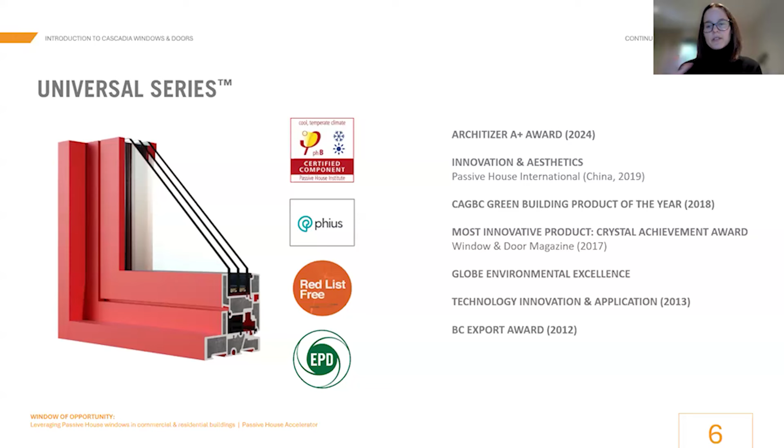And it's really the first of its kind to be designed, built, manufactured, and PHI certified in North America. The use of fiberglass also has these side benefits - you can see the sticker: red list free, non-toxic, low carbon, all that good stuff, which I'll go into more later. As we probably all know, Passive House certified products - you'll be interested perhaps to know that the Universal series got this nice prize for aesthetics and innovation when it was launched in 2019 at the International Passive House Conference.

And to start out with, I was hoping to get to know a little bit my audience. So put down your coffee and tell me what your experience is. How many newbies are on the call today versus how many of you are gurus, seasoned Passive House experts?

This is really interesting, great. So far 78% of people have responded, and 61% of folks on the call have never done a passive house. 26% have done 2 to 5, 6% have done 6 to 10, and 6% have done more than 10. So more than half of us have not done a passive house project yet, and it goes on from there.

Okay, that's great. Thanks, Zach. That's very helpful because I can tell you I'm not going to go into a deep dive into Passive House criteria for windows. However, I'll let those newbies know that I do a completely separate and dedicated webinar that's AIA credited, just focusing on Passive House for windows. It's really a good refresher of what you learn in the course, so I encourage you to sign up for that one separately.

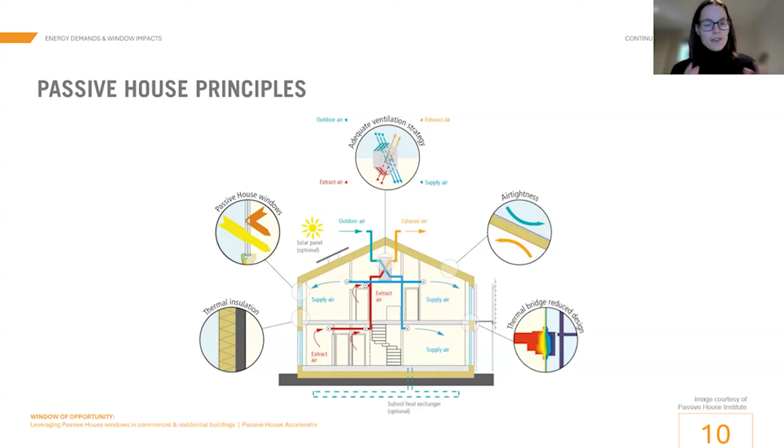So I'm sure everybody has seen this graphic before. It's the most used graphic ever for Passive House. Our Passive House buildings achieve incredible energy footprint reductions over typical buildings by focusing on all of these key principles in the bubbles. But note that windows have their own bubble, and that's for a really good reason — they are the weak link in the envelope, and we really need to pay a lot of attention to them.

This is just a selection of jurisdictions in North America that have recognized the effectiveness of energy performance standards like the Passive House standard, and have encouraged or incentivized project teams to pursue this kind of energy performance-based path, either as part of permitting, with increased floor area allowances, funding, or financing options. This list is growing all the time. City of Vancouver is a great example.

And a little segue to this slide — if any of you attended the Passive House conference in Victoria last year, the City of Vancouver presented this information as part of their learnings. The City of Vancouver has actually mandated that all of their buildings going forward will be built to the Passive House standard. This is a bit of the story why.

If you're looking at this graph, it is essentially the energy performance in kilowatt hours per meter squared per year, across all of their operational building stock. So they have the data to show how all of their buildings are performing, old and new. The interesting thing they pointed out was these dark blue lines here — these are all brand new LEED Gold or Platinum buildings.

So theoretically sustainable, high performance buildings. And they do not hold a candle to the low energy footprints they have seen from the brand new Passive House certified buildings in this teeny little box at the bottom. You can see that box is blown up for you there. Interesting fun fact: most of these buildings have Cascadia products on them.

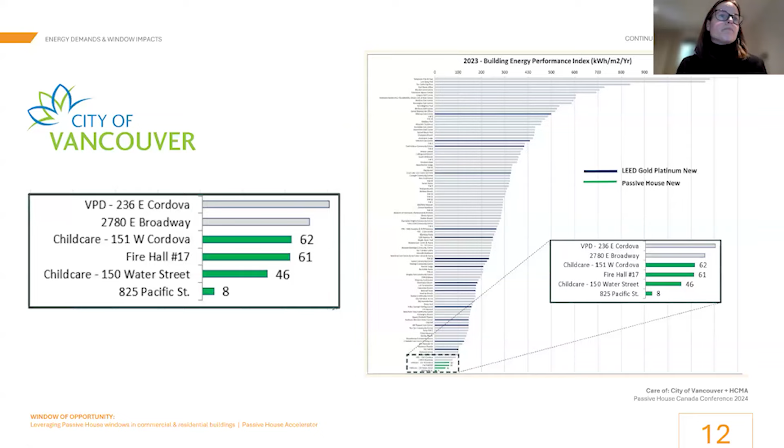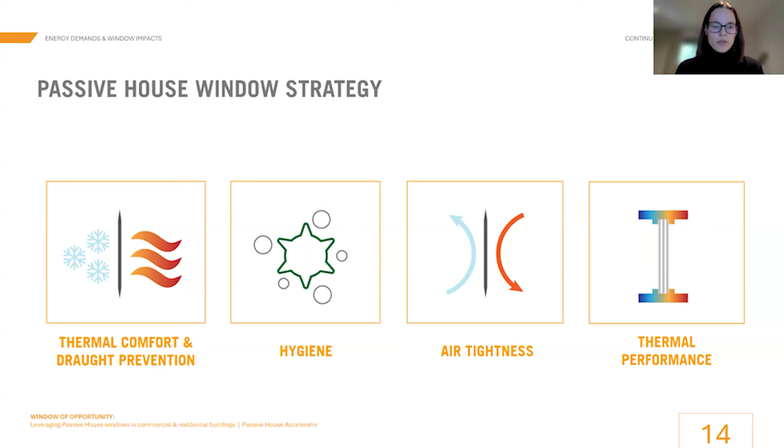Now, the first two are ultimately what we are trying to achieve with Passive House. And believe it or not, the other two are the means to the end of achieving it. So that's the goal: health and comfort of occupants, along with thermal performance.

Now, we can use certified products on Passive House projects or not. Do not think that you are limited to what is shown on your certificate, provided you have a product that performs at a Passive House level, such as what I'm showing you here — a standard triple glazed window from Cascadia — and you have the modeling to back that up and put into PHPP. You have the flexibility to do what you need to with your design.

You, of course, can go to a certified configuration. That's a lever you can pull when you have the option. Typically it increases costs, so again, it's a lever that you can pull.

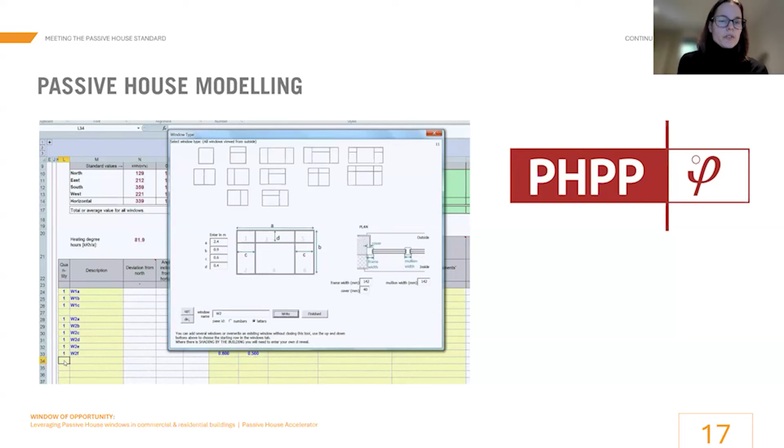The reason why is because PHPP is a very detailed modeling package, and the actual configuration of your windows matters — each condition has to be put into the model to get accurate performance. So having a product and company that provides that modeling is important to facilitating that process. And thankfully, at Cascadia, we do that. This is just a snippet of some of the non-certified conditions we've had modeled that we provide to architects and modelers to enable them to complete their modeling for commercial projects.

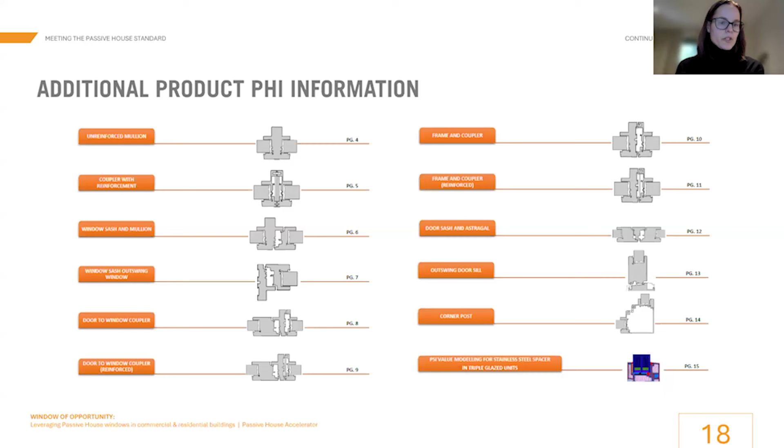Okay, here's the poll we wanted to do later. We have a lot of people new to Passive House, but maybe not new to fiberglass windows and Cascadia. We just passed two-thirds of folks responding: 12% say never heard of Cascadia, 65% say they know the name but not much about Cascadia products, 11% have attended a Cascadia webinar but haven't specified products, and 11% have used Cascadia products on a project.

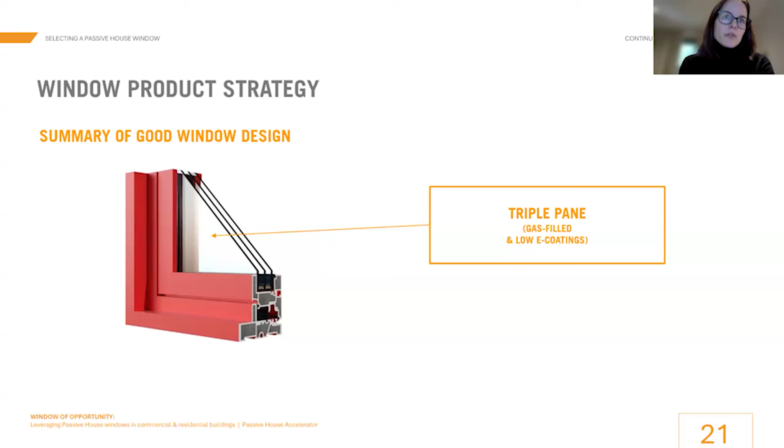So the Cascadia Universal Series is designed from the get-go for triple glazing, Passive House standard, and this is at commercial sizes without compromising on glass thickness or anything like that. So you want a window that can handle all the glass that you need for your project type. So you're going to have 2 to 3 low-E coatings and typically argon fill in that unit, as well as...

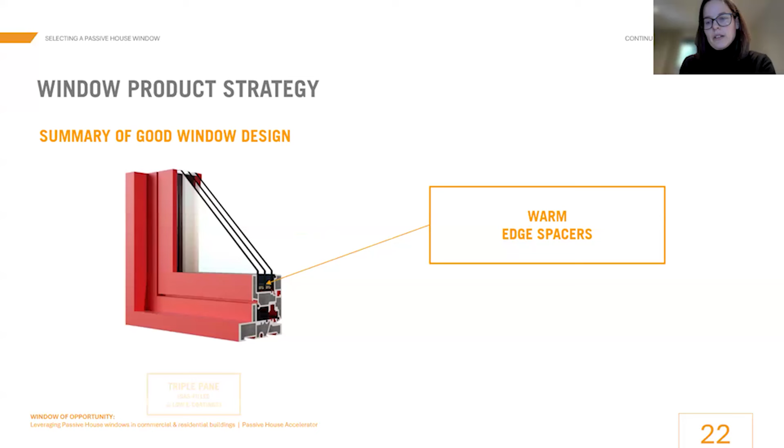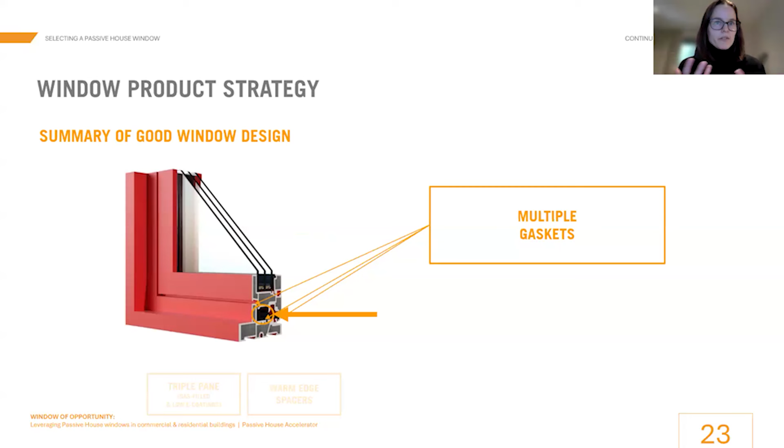A warm edge spacer. This is the weak link of the weak link. We've got a thermal bridge here, so we want only warm edge spacers, in increasing levels of performance available. Multiple gaskets, we want to have any air cavities broken up. We don't want convective heat loss in there. We want maximum air tightness. So lots of gaskets. And insulated frame.

Air gaps are bad for heat loss. So all those frame cavities are full with insulation.

Just a note, which I'll come back to multiple times, depending on your product that you're looking at, that PHI certificate will not show anything in there other than insulation. In reality, depending on your configuration and size, you will likely have reinforcing in there from other products, in particular vinyl products, as size increases.

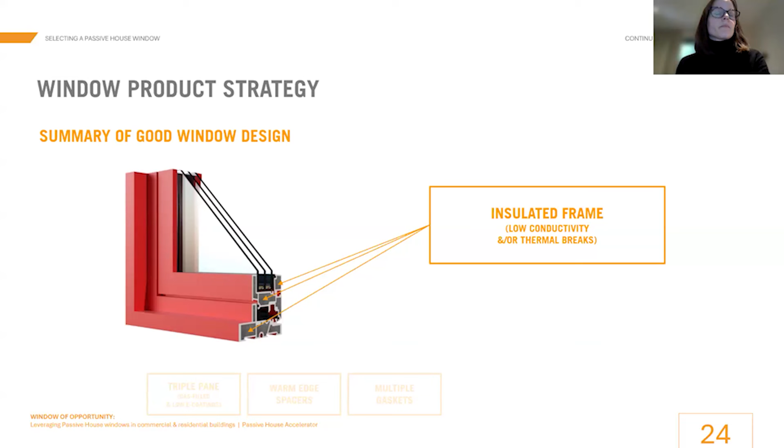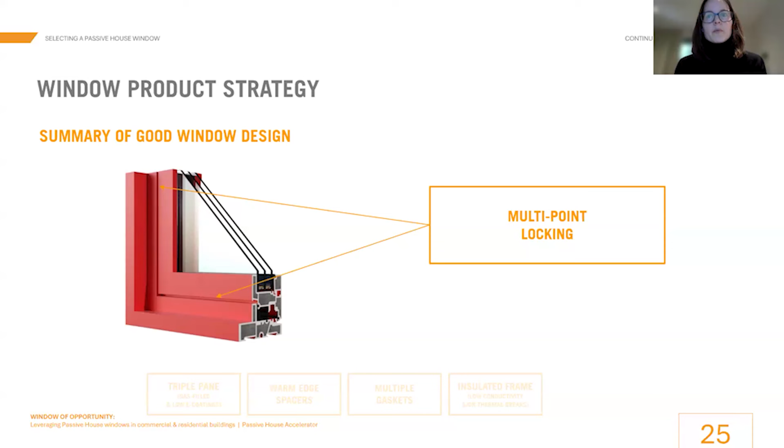Multi-point locking, we want a compression seal, no sliding seals. This needs to seal like a boat hatch for maximum air tightness and water penetration resistance.

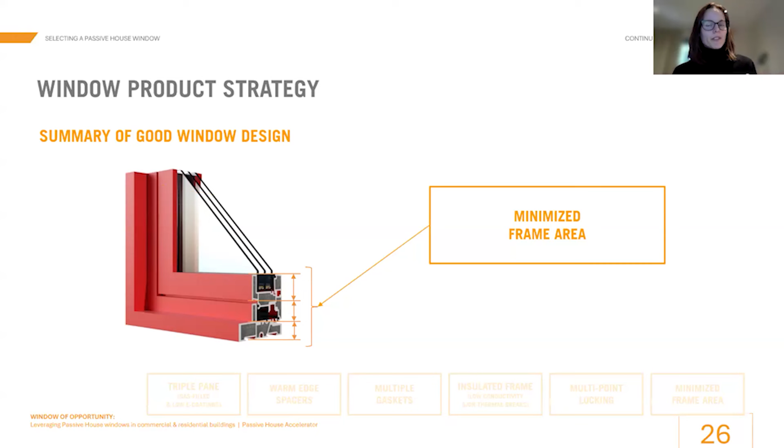We want to minimize the frame area. So a window that's designed to be sleek and low profile as we can, to minimize that heat loss area, but also deliver structurally for the commercial market.

Okay, now let's talk about performance. I'm going to go through some material properties, especially for those who aren't familiar with fiberglass. It really explains why it's the material that we focus on for our products.

It's going to require a lot of effort, engineering, and thermal breaks to make that happen. Our next property is strength and stiffness. This determines the bending strength. Young's modulus, or modulus of elasticity, determines how big your window can span.

I've got steel up there as the reference material. That's our structural material at 200 gigapascals. And then our frame materials below. So just looking at this, you would think...

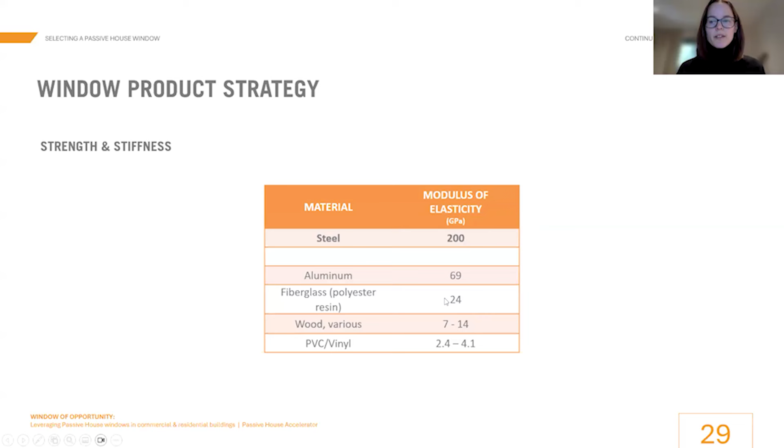That PVC might not be able to make a window out of it. Well, guess what? It gets reinforced with other higher conductivity materials, compromising its thermal capabilities. Aluminum, likewise, very strong, compromises its structural strength by adding in complex thermal breaks, and that brings it down. So just note, fiberglass is nicely in the middle here, kind of set up for success.

The thermal expansion coefficient determines how much your material expands and contracts relative to temperature. And it's not often thought about, but very important, since these windows are complex assemblies with many different components inside, including our glass unit. And then we have our frame down here: wood, fiberglass, aluminum, and PVC. So in the factory, everything fits nicely. And then as soon as we change our temperature, the thermal cycles begin, expansion and contraction.

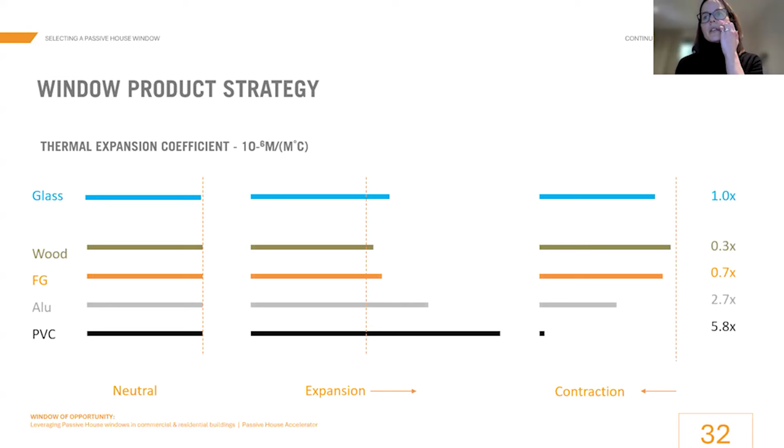So why do we care? There are seals and joints between all of these components that are critical to maintaining the performance. We want to keep our Passive House certified performance. We want to keep our water penetration resistance. So this matters.

Quick note here that wood looks pretty good on the scale. However, yes, thermally it is, but for relative humidity, it is not. Wood changes dimensionally dramatically with relative humidity. And of course, fiberglass is almost the same as glass because it's mostly made of glass.

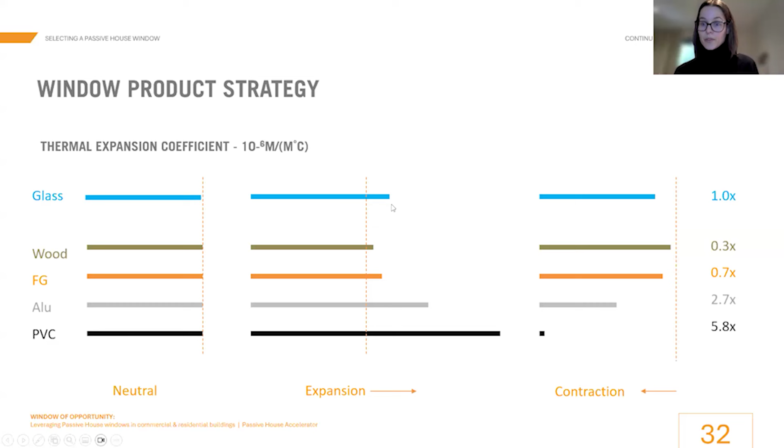So minimize stress. Here's just a visual of the impact of dimensional change. You can clearly see that depending on the extent of this deformation that happens in these materials, you can get premature failure and impact to performance. This really comes from the difference between a thermoset material like fiberglass, which is cured with an irreversible chemical bond, versus a thermoplastic or thermal molded material that uses heat to change its shape, making it more susceptible to this.

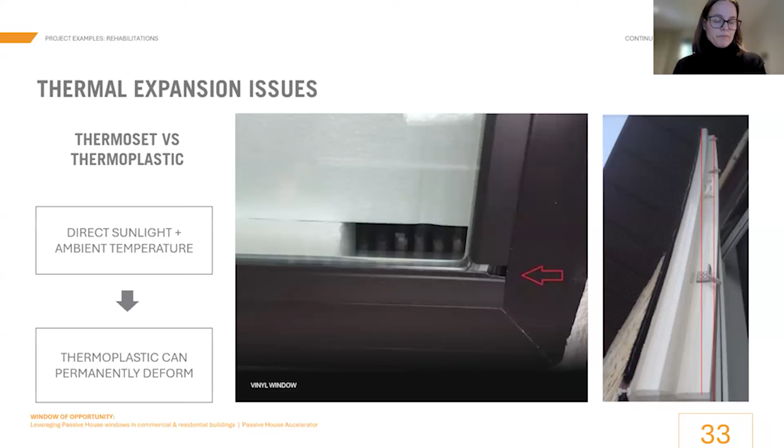So it's a common theme. Last aspect on my value topic is lifespan. I think many people think of lifespan as a binary thing, like it performs until one day it doesn't.

But that's not always the case. We have to think about how long until I ultimately have to replace this thing, but also how long can I expect it to perform as designed on day one. And then what is the impact of that lifespan from an energy and carbon standpoint?

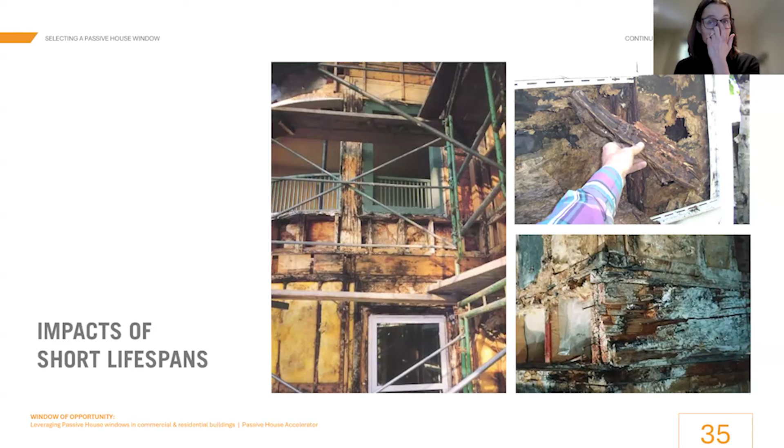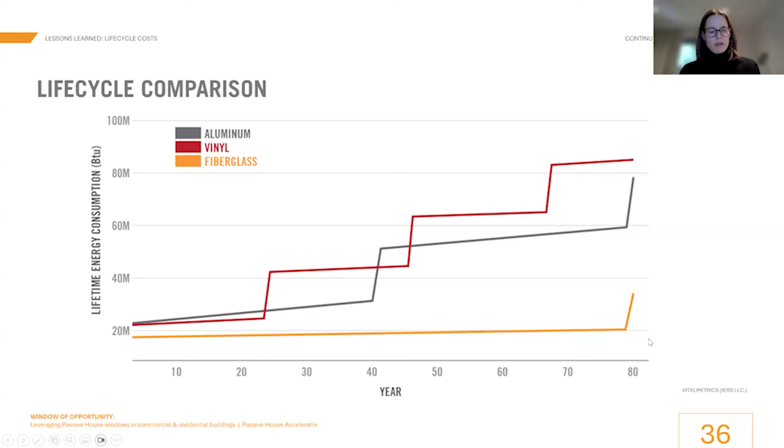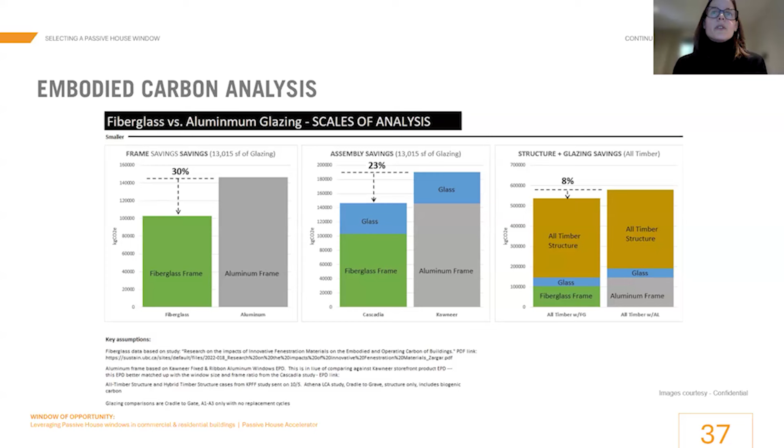Now, this kind of analysis is really important, but it's only made possible by the data we have available. So a quick note to those considering life cycle analysis on their buildings: you need EPD data in order to do that. Cascadia has an EPD. I could do a whole separate chat all about EPD and embodied carbon, but I'm just going to give you a few quick notes here to think about.

Yes, ask for the data. It's out there in increasing amounts. However, you need to check the PCR, the product category rules that your EPD is based on. These, just like any standards, have base assumptions that dictate what's included and what's not. Otherwise you could end up comparing something that has no fasteners or hardware in it to something that has no glass, for example. So check those details.

Check the date. EPDs are only valid for 5 years and then they have to be renewed. So there are lots of EPDs out there based on old PCRs, not the same rules. And then, of course, confirm the stage you're looking at for any material. Is it cradle to gate? Is it cradle to grave? These things are not comparable, so be aware.

Okay, so in summary, taking all these things together, yes, we get value, but ultimately when we're working on passive house projects and projects in general where there's a whole building energy model and we're looking at the whole building, it's no longer the window against another window. You're looking at the window against the rest of the building. What does optimizing those windows get you in terms of value and flexibility elsewhere in your design, like insulation, mechanical systems, etc.

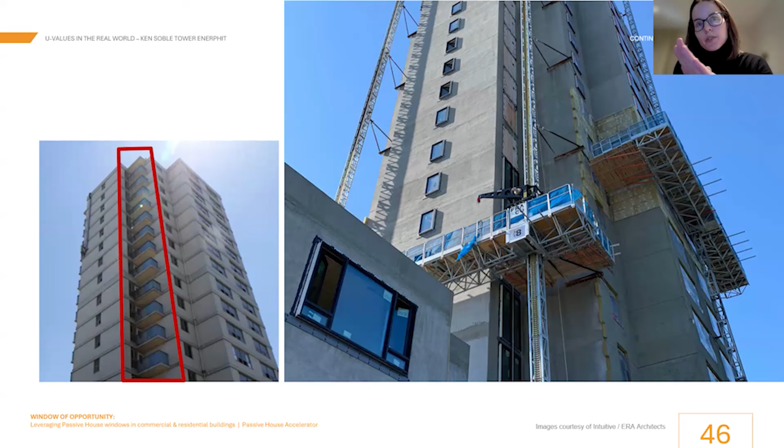However, those balconies highlighted on the left side, not so easy to just wrap around and get rid of. So the solution for this project, the only solution to make the energy model work, was to chop them off completely and replace them with Juliet balconies. You can also see the windows are pushed right outside of the structure, but I'll come back to that.

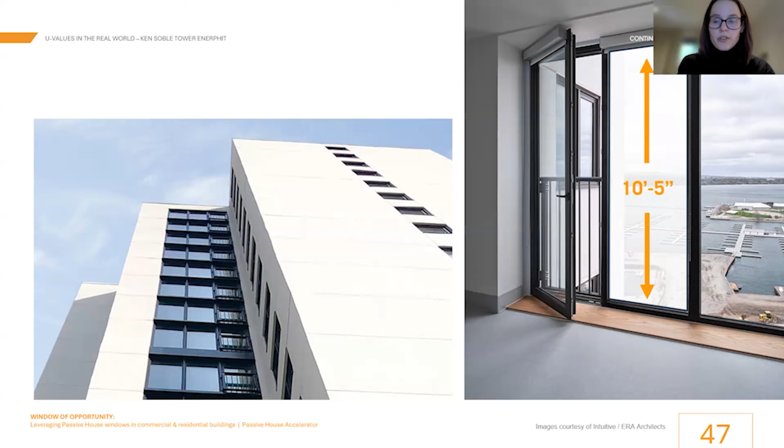The solution was a third-party Juliet balcony integrated into the Cascadia window system. This is an in-swing tilt and turn window, full height, reinforced to accept those Juliet balconies — and by the way, they're really big, over 10 feet. So the structural capability to do that while maintaining thermal performance was key. Cascadia was, of course, side by side every step of the way, assisting with the design, modeling, and engineering required to make this solution work.

Now let's fast forward to a newer project with very similar challenges. Feast your eyes on Coal Harbour Phase 2. This is soon to be the biggest passive house project in BC, a mixed use building, very big, also with the challenge of balcony thermal bridging and very large openings, similar to Ken Soble.

However, unlike Ken Soble, this is a brand new building, so the designers were able to optimize everything to what made sense for the building from the get-go. What was done in this case was an integrated Juliet balcony. They said we don't need balconies — they're a thermal bridge we cannot mitigate. Thankfully, Cascadia now has an integrated laminated guard Juliet balcony that is very high performance, in addition to being much more cost effective than those bolt-on type Juliet balconies.

One thing to note here, you can see the top rail — this is a code requirement for the City of Vancouver, but it's not necessarily required on your project depending on where it is. It could be just like this glass.

It's hard to tell from just the pictures, but this is a very large building with very large openings, and you can see these highly insulated opaque areas. This is accomplished with Cascadia's window wall system, which did not exist at the time of the Ken Soble Tower.

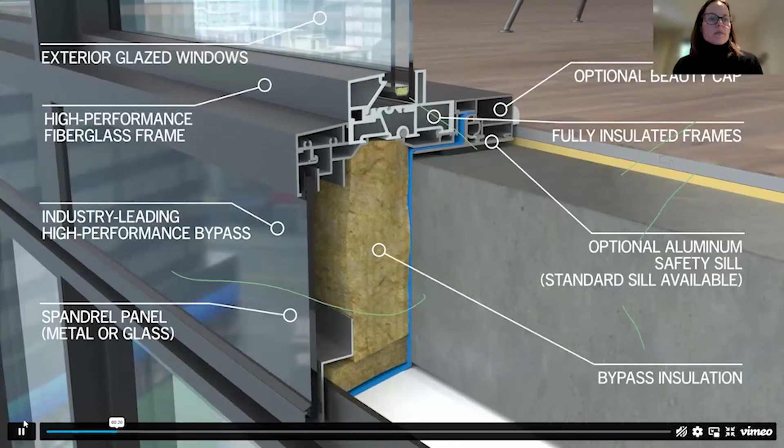It's hard to tell for people who aren't familiar with the difference between window wall and curtain wall, but it's because they're both continuous glazing systems. Where window wall differs is it actually rests on the slab like this. You can see the Cascadia Universal Series here in fiberglass with an extension on the outside to permit that continuous glazing and fully insulated bypass area.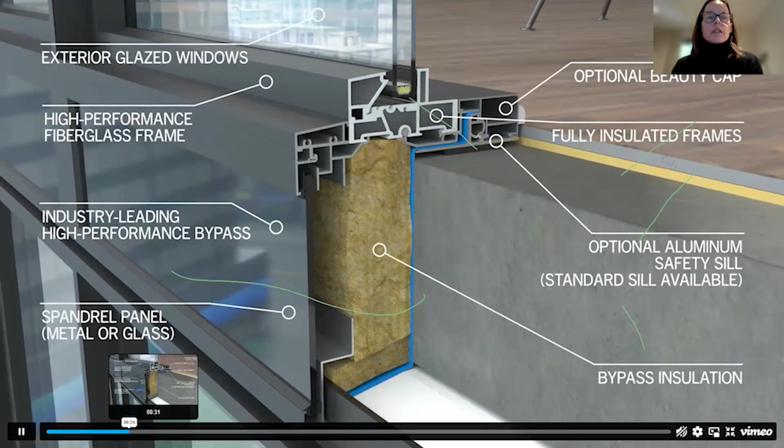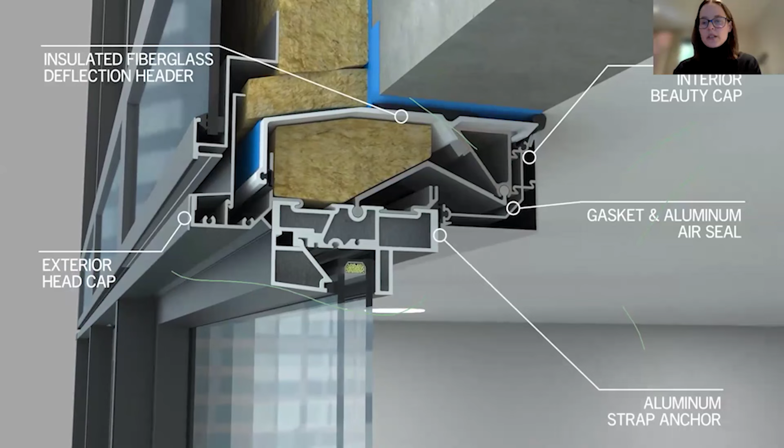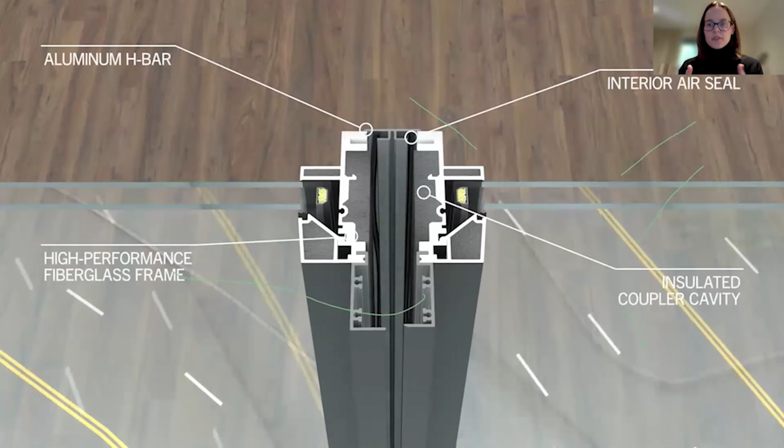Additionally, at the head of the window, there are additional components which allow for increased deflection capability needed for high-rise windows and continuous glazing. All of this is thermally broken, made of fiberglass, with no change or compromise to the passive house thermal performance. Also, this is a factory-built system, unlike curtain wall — each piece is built in the factory and assembled on site, allowing it to be installed quickly and efficiently.

Some of the other features of this system are fully insulated corner posts. You can see here with mineral wool.

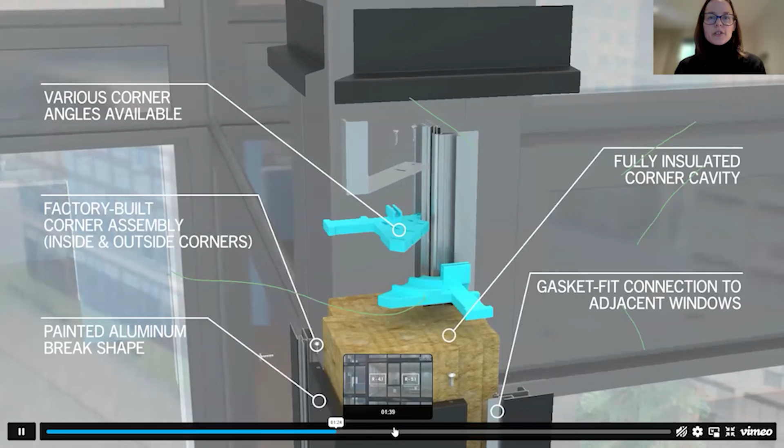And then I'll just jump to the glazing area. Passive house level thermal performance is still maintained with all of the opener capability.

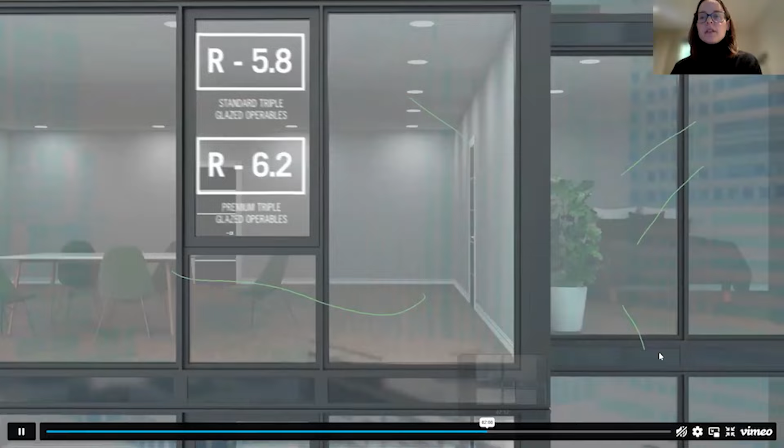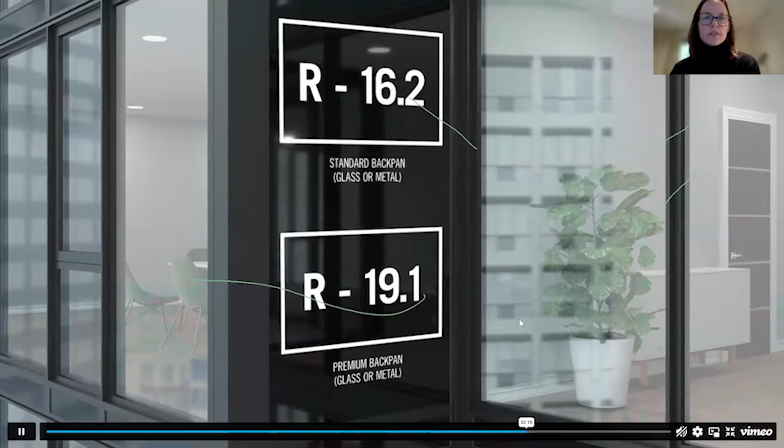I'll quickly mention the opaque areas. You have a slab bypass, which is a massive improvement. This is a typical weak link for any system. You're expecting R16 up to R19 for these opaque areas, compared to a typical window wall made from aluminum, which is R1 to R2. So a really huge improvement dealing with the weak link.

You can see this video in its entirety on our website. I'll jump back to the presentation.

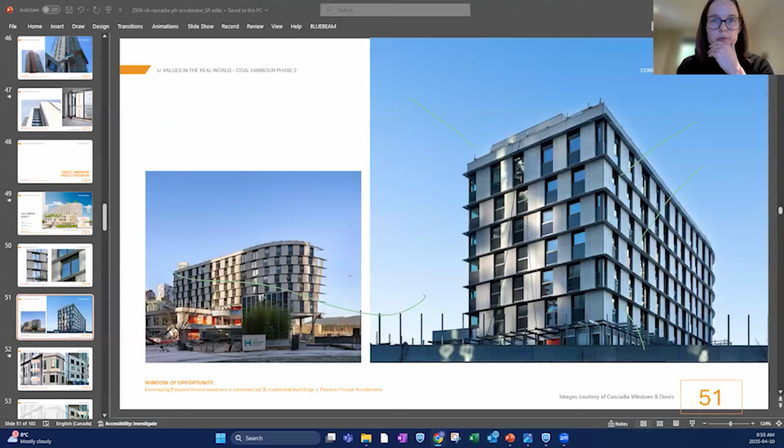I don't know who scribbled on my screen, but there's some scribbles. Are you guys seeing the scribbles? I'll work on removing it. It's like when we have the markup thing enabled, and then I notice it. No, there's another one. Please refrain from scribbling, people. I can continue with the scribbles, but it's mildly distracting. Thank you for the patience, it may take me a bit to figure out how to erase them. My apologies. No, it's all good, they're almost pointing to what I want them to point to.

Back to Coal Harbour, we've got the window wall with a mixture of opaque and vision areas. That is slab bypass plus backpan areas, as well as parapet. So above the window, those are the parapet areas.

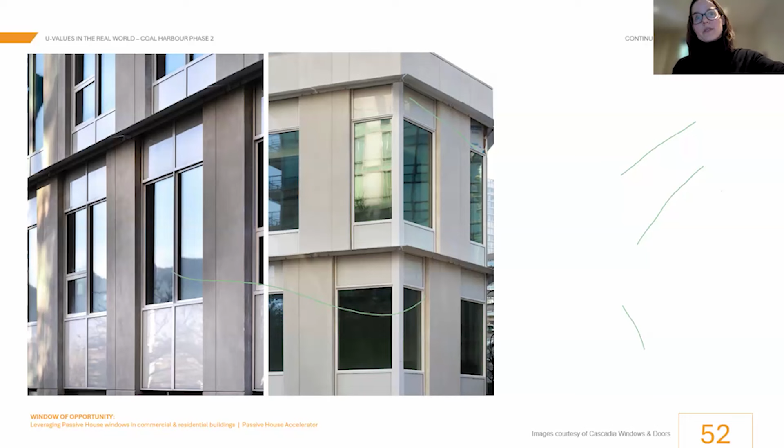We've got corner configurations, and by the way, these are really big - you can see this little man up here for scale. Also, none of this shows up on a PHI certificate. We could not put this on a PHI certificate. There's no PHI certified window wall - you can have curtain wall, but you can't have window wall.

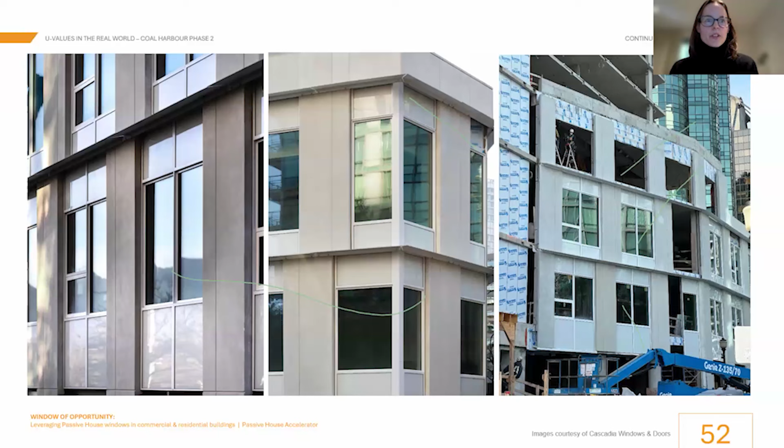This means Cascadia was again here every step of the way, helping with the modeling, supporting RDH when they had to get all of these conditions modeled in order to make this project work. Oh, and by the way, did I mention these are big? 13 to 15 foot spans here, all factory built, unitized. The only other option here was a very expensive, highly engineered curtain wall system, and Cascadia came in to save the project cost.

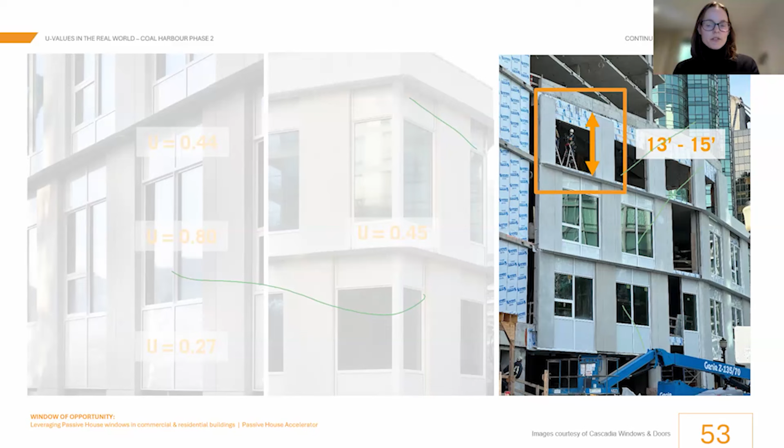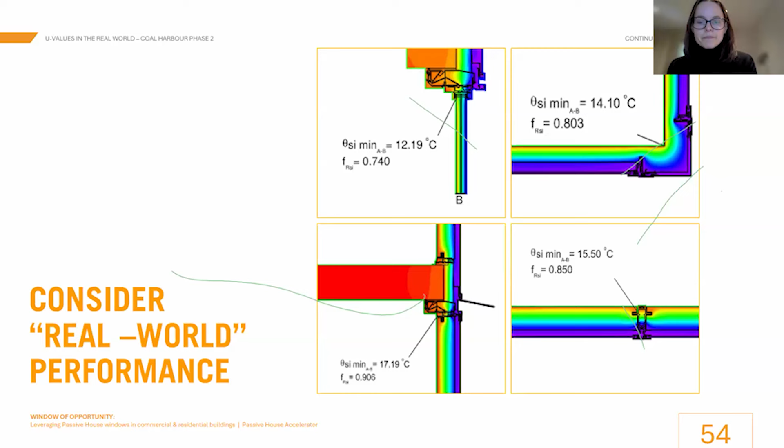So, pretty isotherms - everybody likes to look at isotherms. But the point here is what Cascadia offers is not only the PHI certified performance, which there are many, many products out there that are PHI certified. When we take into account the size, scale, and things that need to be done on large commercial buildings while maintaining that PHI certified performance, there really isn't another option out there that can do what Cascadia does. We do the modeling to support those conditions.

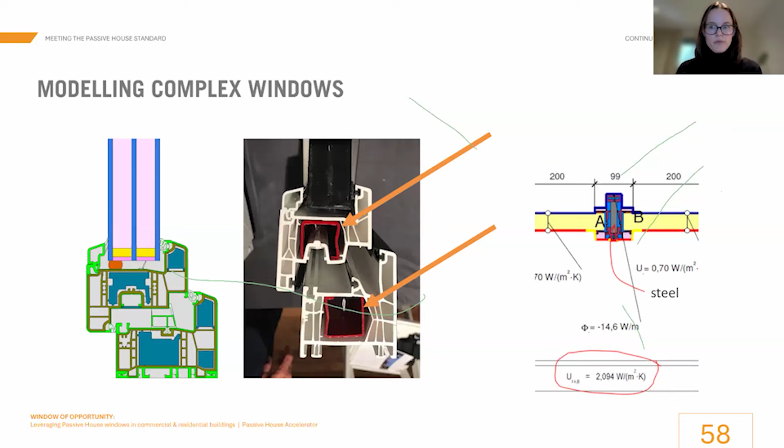That piece of steel changes the U value of the Cascadia mullion from the 0.8 to 0.9 level of watts per square meter to 2 - so it's more than doubling. That internal reinforcing has a huge impact. Not to say that you can't do it, of course you can, you just need to be aware, have the modeling, and account for it. Ideally, try to avoid it in the first place.

We've got over 20 feet of glazing here, withstanding very high positive and negative pressure loads with zero leakage, our passive house leakage level, as well as very high pressures for wind-driven rain. Imagine blowing 100-mile-an-hour wind-driven rain directly at the system with zero leakage to the interior. The whole thing is also frozen for multiple days on end to ensure there's no condensation issues or weak points.

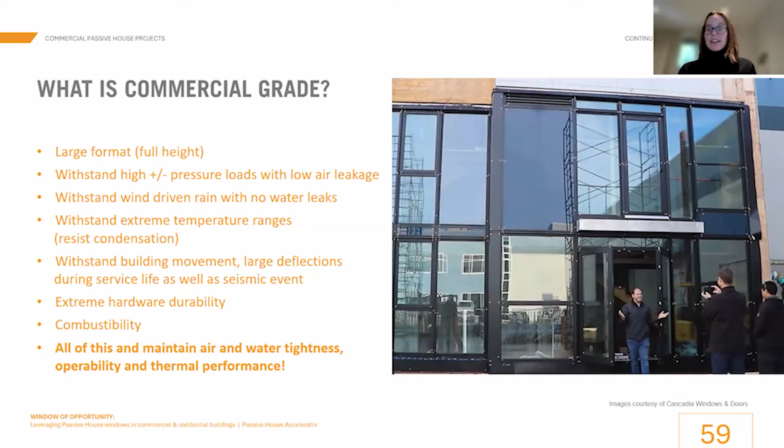Then seismic movement: the two stories are moved, or interstory drift is simulated, for a regular service life of 1.5 inches in either direction. The system has to withstand 3 inches of movement to simulate a seismic event, ensuring it's not dropping things on people trying to escape the building. You can see on the right how the flashing was bent by this test, yet the Cascadia system still stands operational afterwards. So all these things, which normally a curtain wall is only expected to do while maintaining that passive house performance, is really incredible and unique.

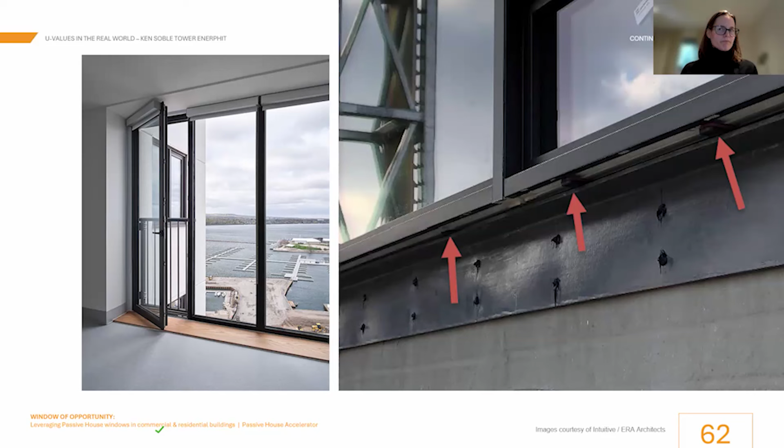So on to my second topic, which is windowsill thermal bridging. This was the solution at the time: a fiberglass angle—great solution. What's strong, structural, low conductivity that we can put in there instead of a steel angle? Fiberglass. However, this involved a lot of help from Cascadia engineers, a highly engineered solution, and it came with its own challenges. So what did we learn from this?

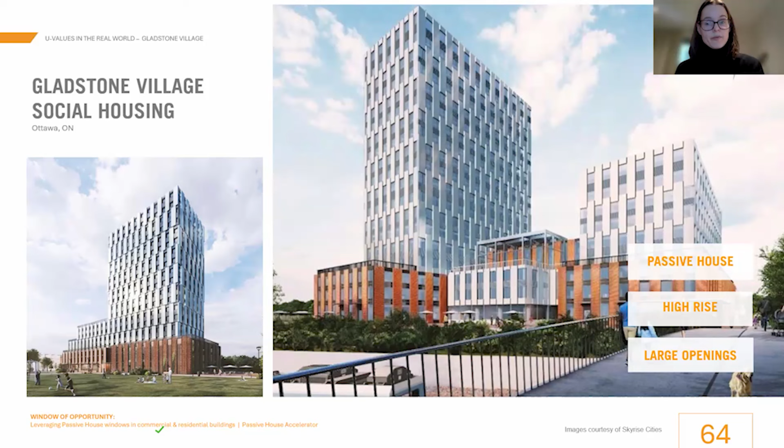Fast forward to another brand new project just coming out of the ground now, Gladstone Village Social Housing, also a Passive House project having to meet Passive House criteria, wanting to push those windows out into the thermal envelope. So, Passive House, high-rise, very similar criteria to Ken Soble, as well as very large openings—we're trying to maximize the fresh air and open area for the occupants.

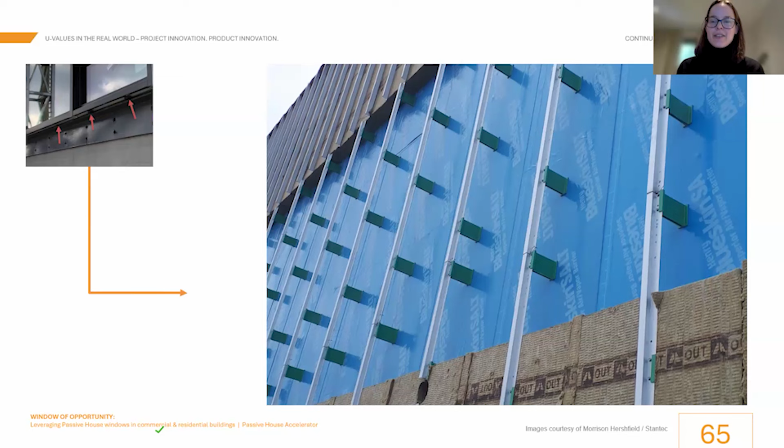So instead of this custom engineered solution, why not take something that's ready to do this out of the box? Look at the Cascadia clip—it's pre-engineered. It loves sticking itself to the side of the building and holding really heavy things like cladding. So why not try putting that under the window? And that's exactly what was done. It comes in a ton of standard sizes, ready to go—nobody's got to cut it on site.

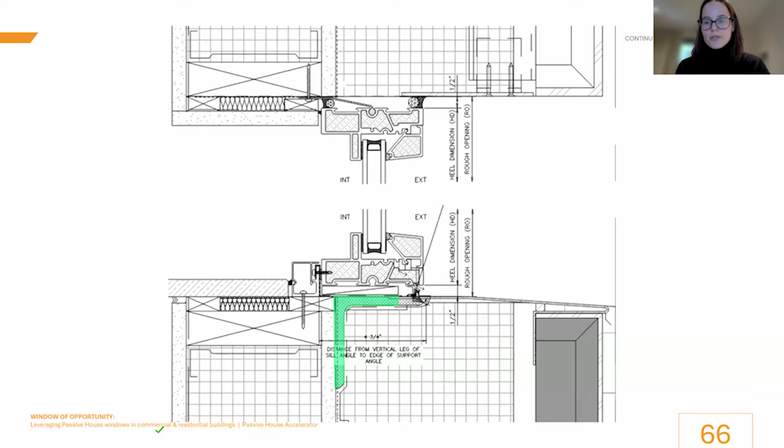So this is what the Gladstone project team ended up doing: taking the fiberglass angle that was originally in the design and swapping in the Cascadia clip. You can see, to make this work, there's a little aluminum angle at the front end which supports the shim surface of the window, but it's all thermally broken, not connected back to the structure. This changes it from a continuous thermal bridge into an intermittent thermal bridge at the sill of the window, further improving the thermal performance.

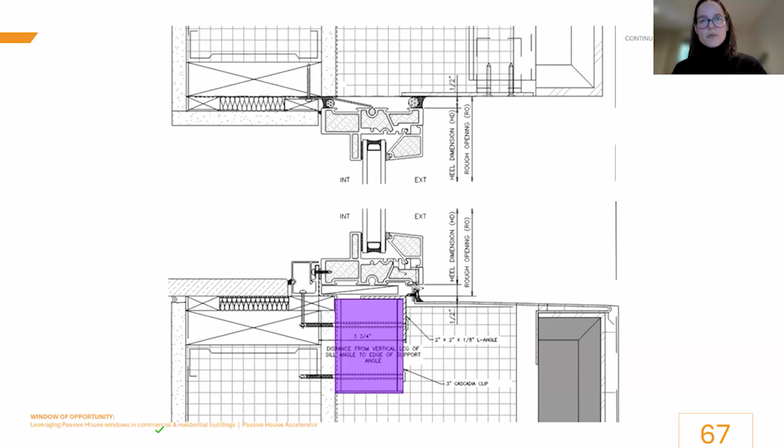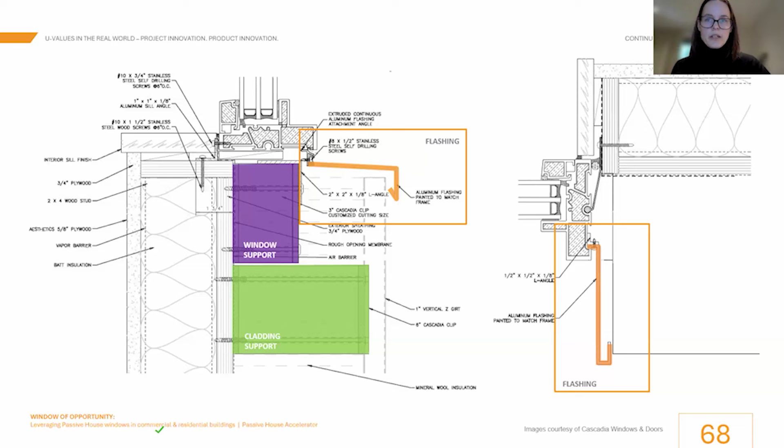Here's what it looks like on a bigger scale, including other envelope components. You have your window support clip, and then your cladding support continues on at whatever depth is needed for the rest of the project, holding that vertical girt in this case. Then you can have your flashing connect back to the window without creating any kind of thermal bridge back to structure.

So what you end up with is essentially a thermal-bridge-free sill connection by Passive House definition, which has been thermally and structurally modeled by Morrison Hershfield and Stantec—shout out to them, you can have those reports to use on your project. The structural and thermal modeling has been done for multiple backup wall configurations—concrete, steel, whatever—to give your engineer the confidence that this can be used in any situation, any building type, with any size window, as big as you can build. It can handle it.

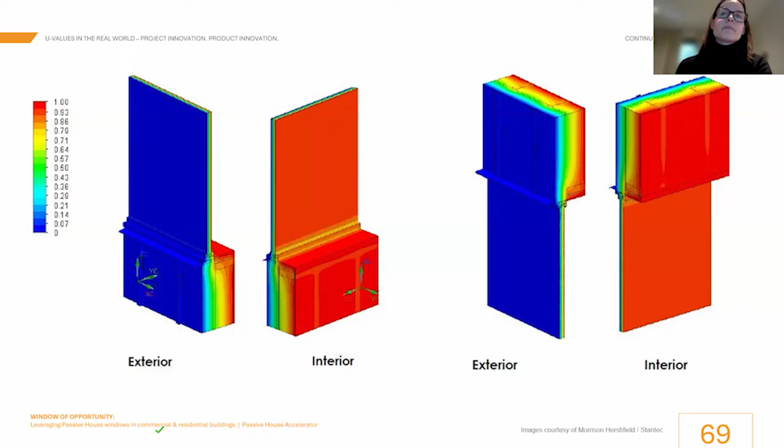To further provide reassurance to any architect looking at using this, we built a mock-up in our factory with our water penetration testing setup, and tested this to our standard 15 PSF water penetration resistance. So it just looks like this with the clips, and then you can see the standard strap anchor connecting the window back to the rough opening for that inward-outward force. And then we have the backer rod and primary interior air and water seal there, still fully capable of doing its job in this exterior position.

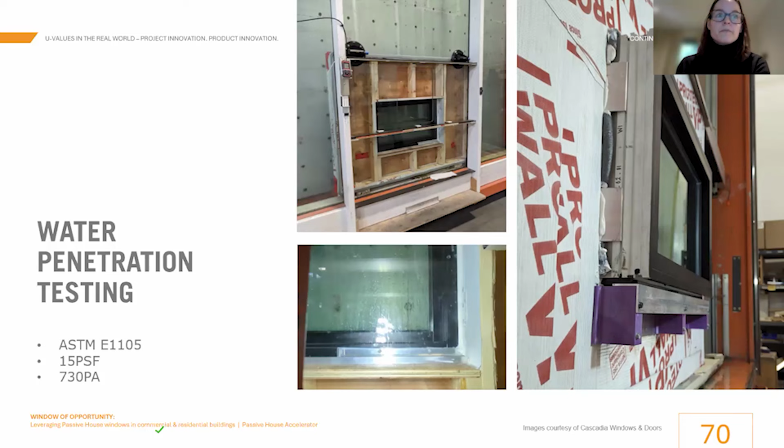Another thing to note is this is a Cascadia specific configuration I'm showing you here. The Cascadia window is designed to support itself structurally, and just use fasteners and the strap anchors to tie it back to structure. So it's okay hanging out here by itself. If you use another window product, the solution may not look quite like this. You may need Cascadia clips all the way around, for example, if there's openers, just to avoid any kind of torsion or whatever. So that may need some more engineering.

All right, UVic. This is another project that has been profiled over and over, and shout out to Maureen Sanchez at RDH, who has presented this many times, much better than I could, so I won't try. But here is the building, and the Cascadia specific solution that we were able to provide here was to answer the need for big openers, as much fresh air as possible into these student dorms, while also acknowledging there's a serious space constraint here. We can't just go with our typical in-swing tilt and turn window.

So again, the need for high performance outswing was critical in this project. There you see them. Fun fact here was, we had to work with our team to adjust and customize all of these restrictors to maintain the 4-inch gap for fall hazard, while also getting past this thick exterior insulation and giving the occupants the fresh air they needed. As you can see, itty bitty living space, no space for in-swing windows there.

This next building I'm going to talk about is the PAE living building. So it is not PHI certified. However, for anyone not familiar with the living building challenge, living buildings are pursuing many of the same ideals as Passive House, and then some. So we've got energy efficiency as a target. Just like Passive House, we've got the need to provide for all of the energy needs with the renewable available on site. In addition to that, we have very stringent resiliency needs, ability to withstand climate events and the building has to last 500 years, as well as carbon. So LCA analysis and embodied carbon analysis was done on this building.

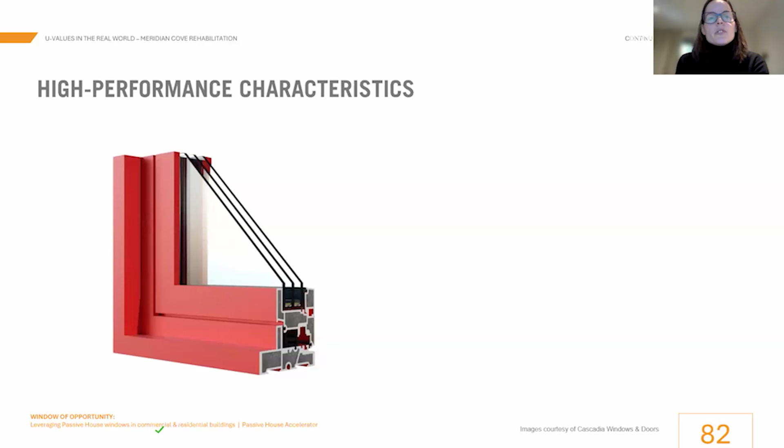And lastly, to finish off with the success of this project, while it wasn't PHI certified like I mentioned, it achieved kind of everything that Passive House is trying to achieve, which is health and comfort of the occupants and thermal performance. And we know this from the actual owner feedback now.

This is a building that's been lived in now for over a year, and the occupants have reported increased comfort. They say, 'I'm so comfortable, I can sit beside my windows for the first time ever, they're so great. Oh my goodness, these triple glazed windows are so quiet.' It's amazing the improvement in their quality of life. And to finish it off, they've all been very happy having their energy bills at a third of what they were before. So, a huge success.

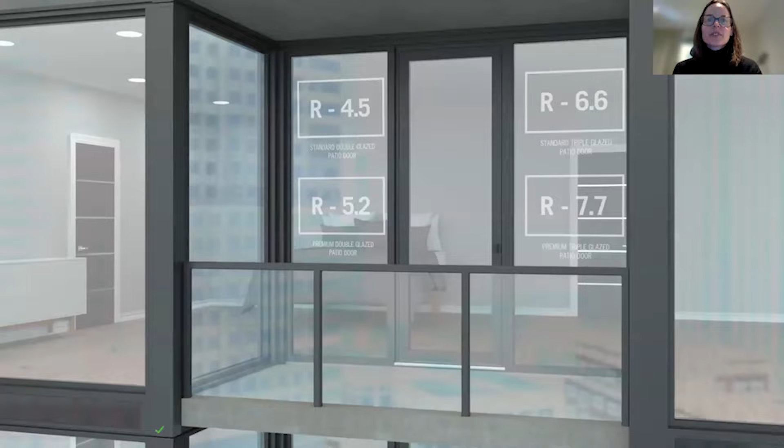That's an easy answer. Cascadia has residential doors for patio and, shown in the movie here, for residential entry and balcony applications, but they're all fully glazed like this. So you could have a simulated divided light, but you're not going to get a half fiberglass, half glazed window, in an outswing.

We have been asked to provide solid panel doors before, which would be a custom solution that you could have in various colors or potentially with a skin on. But in general, no — it's just a painted frame with full glazing, which is what we offer for residential entry doors and patio doors.

Any suggestions of who to go to for that more traditional wood-like appearance for a front entrance? Doors are a tough question — there aren't many Passive House level performing doors out there, and I unfortunately don't have a recommendation off the top of my head for a wood look, other than actually getting a wood door.

Thank you — yeah, we're running into the same problem of just not finding it, but thank you. Yeah, thanks. At least we've got you covered from the thermal aspect — unfortunately our aesthetic is limited given our focus on just performance and the commercial market.

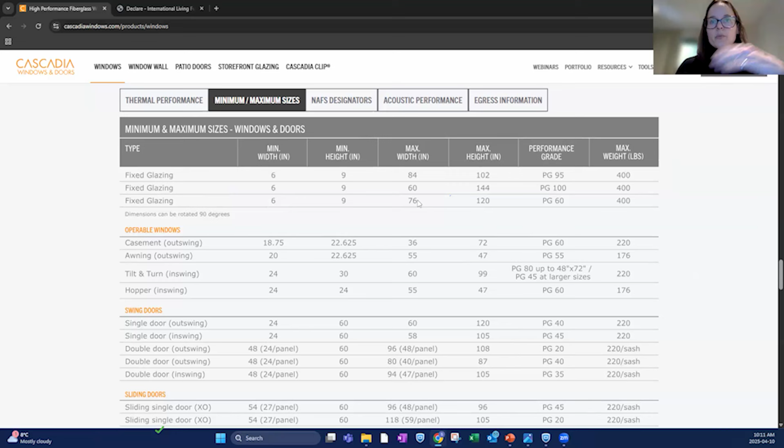Because this is a factory built product, we're limited to what has been tested for maximum sizes in the lab. So you can see here, if you have a 12 foot tall window, you can go 60 inches wide without a mullion in that unit. If your unit is 10 feet tall, you can go 76, so you can go a bit wider. If it's a little shorter, you can go even wider, within the square footage limits of the glass.

Okay, and this question you may not be able to answer, but I'm going to ask anyway. I understand that different fiberglass materials from different manufacturers have different strengths. And one thing that I've heard from a different manufacturer was that the strength of the fiberglass is dependent upon the percent of roving, or the strands of fiberglass. Do you know what percent roving you have in your material?

I do, and I'm sure this is something that Chris is feverishly looking up right now. However, I would tell you that to focus on little material composition elements like that is kind of getting into the weeds, because what ultimately gives your window its strength and performance is the design of the profile, like how much fiberglass is in there.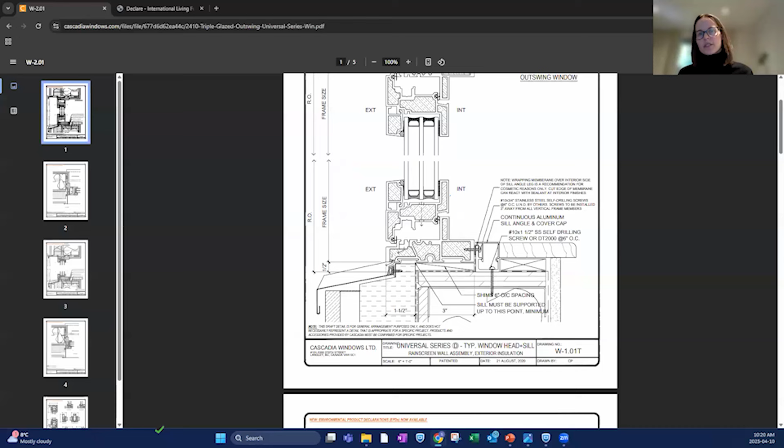Lots of downloads available in PDF and CAD format. This is just a typical installation example. It's neither high performance nor low performance, nor good nor bad, but it shows you what the Cascadia window needs, which is fastening, support, and seal area. Provided you follow that, whatever goes around this area and how it integrates is up to you. We have a membrane connection here back to the interior seal, and a membrane connection here to the back dam angle.

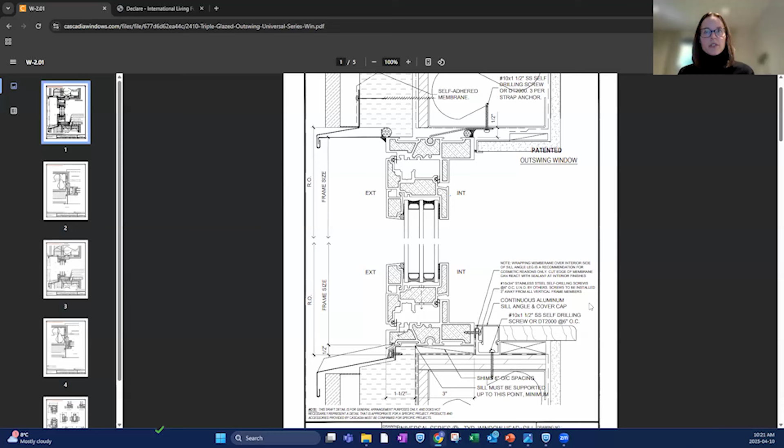Yeah, whatever goes on either side of that, it's very flexible. And for technical support, you have people available to answer questions from individual people. Absolutely, we have a high tolerance for that. We have lots of geeks on our team.

We also have a ton of resources, like videos, if you want to know how it gets installed. This shows the full install sequence, including waterproofing, which isn't part of our scope, but we show good practice, mulling the windows together, assembling doors, etc., fully rendered. So that's there for you. And should you have a project using Cascadia windows, we provide a multi-step interaction process with our clients where we make sure everybody understands what they've ordered, go through detailed shop drawings, and then have an install training with whoever's actually going to install the windows prior to shipping.

Two more short questions. Your doors, are they tilt and turn, or do you offer tilt and turn doors? Yes, our slider doors are tilt and slide, so they can tilt in and also slide. They can be inward sliding or outward sliding, in which case they don't tilt. And the swing doors, the in-swing version can also be a tilt and swing door.

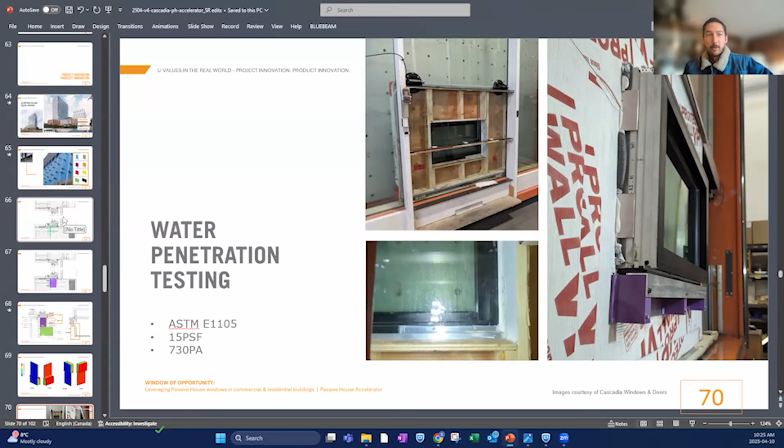Just got a question about your Gladstone project that you mentioned. You mentioned that they switched up the window install to use your Cascadia clip to support the window. I'm curious what the main driver was for the team to go that route. Was it more the structural capacity, or was there some energy savings found with a lower PSI value with the install? Did that help maybe reduce the wall insulation or create some other savings for the project?

That's a great question, that answer is to be confirmed because the thermal part of it is still being analyzed by RDH, but I think it was just enough of an ease-of-use switch for the installer, because this is actually in the installer's scope, putting in this angle, that they were like, yeah, that makes sense. I think we had provided all of the thermal and structural modeling up front. We had our glazing engineer look at the angle, and it turned out they would actually have had to beef up this angle over what was designed. It was under-designed as it was. So the combination of increasing costs of the original solution, the increasing simplicity of our solution, and the clear structural capability demonstrated with the report and our engineer backing it up, made it really an easy choice for them to okay.

And was that process pretty easy for their engineer to look at this and not be scared with the innovation of it, not having seen it before? Were they able to analyze that no problem?

It wasn't their engineer, I think it was the fact that we had so much support that we offered up front that made it easy. So the combination of the Stantec Morrison Hershfield structural report, as well as our engineer looking at this specific scenario and saying, yep, you'll need this many clips, this size with these fasteners for your backup structure, I will sign off on this kind of thing, just gave everybody reassurance that it would work.

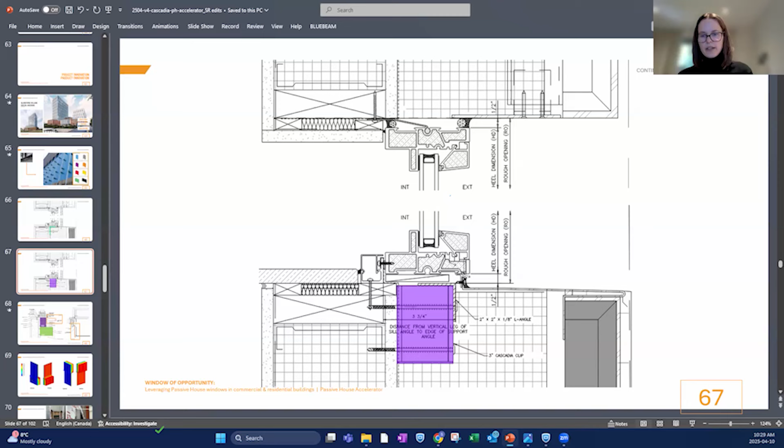Great question. Yes, depending on the size of the window, they do get broken up and assembled on site. That usually has to do with handling. There's a couple of limits: how much weight do your installers want to handle on site, what equipment are you prepared to have on site, and then there's the limitation of what Cascadia can actually handle in our factory, which is usually around 500 pounds or so.

So take, for example, I've got this crate for that middle school I was talking about earlier. Let me try to grab it to show you. Give me a second. For some reason I'm not able to grab this, but there we go. So here's a nice crate about to go out.

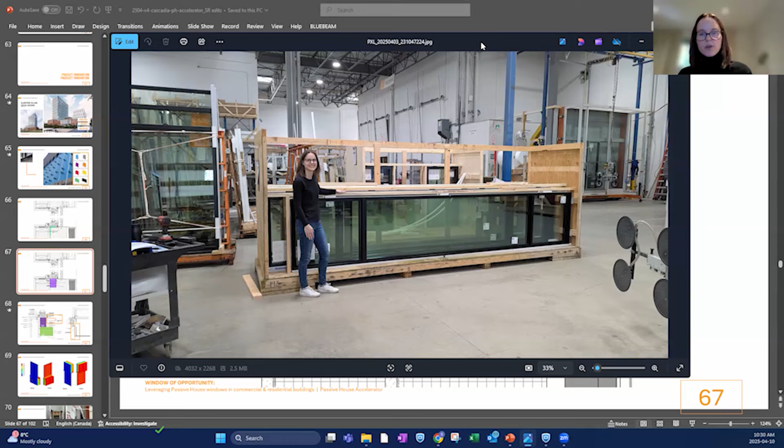These windows are going to be attached to each other along this side. They're going to be flipped up vertically and mulled together along this side on site, because those are each probably 400 to 500 pound windows. They have components used to connect those together that basically become invisible once installed and just look like a mullion. They're crated, and we use strap anchors to attach the windows to the crate.

Hopefully that answers your question.

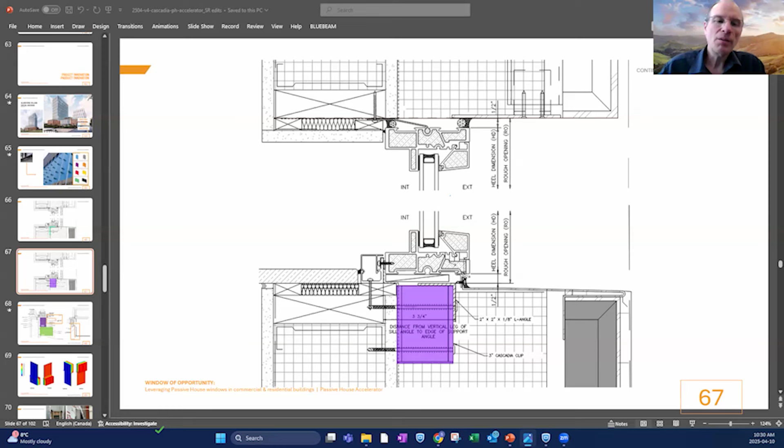Fantastic, okay, so next up is Steve. You didn't mention much about the low-E coatings and driving the R value up by using higher performance coatings. And also, relative to the last question, if there were a lighter weight material other than glass, would there be value in that?

Lighter weight material other than glass—are you hinting at opaque materials? No, for transparent coated materials. If there were a material that had higher performance than existing coatings, are you coating agnostic, or do you work with an IGU manufacturer and just use whatever meets these specifications?

We certainly work with specific IGU manufacturers, mostly for supply chain, quality, and reliability track record reasons. Also, we have to supply what's shown in our NFRC thermal—we can't supply anything that's not thermal modeled and meets North American standards for that kind of stuff. So for that reason, we're not just popping in any newer or experimental products.

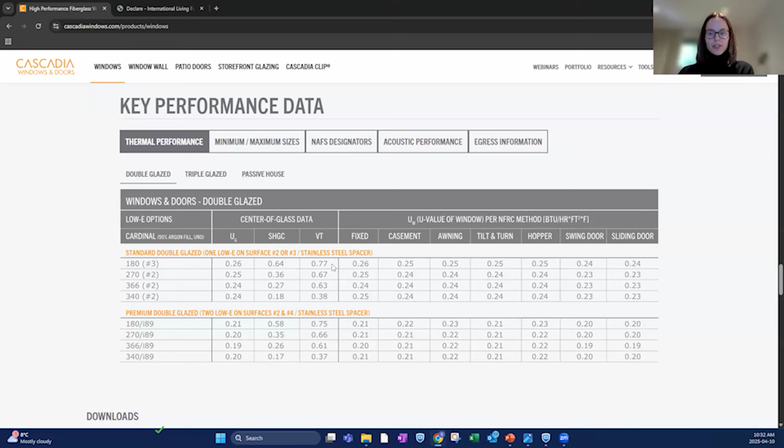That being said, we have just recently launched a product which has reached its level of track record and ability to be launched, which is vacuum insulated glazing. That's the kind of new wave technology everybody's been waiting for. It's still in its infancy with Cascadia, but it's very promising, and we're seeing R12 with our windows in that kind of situation.

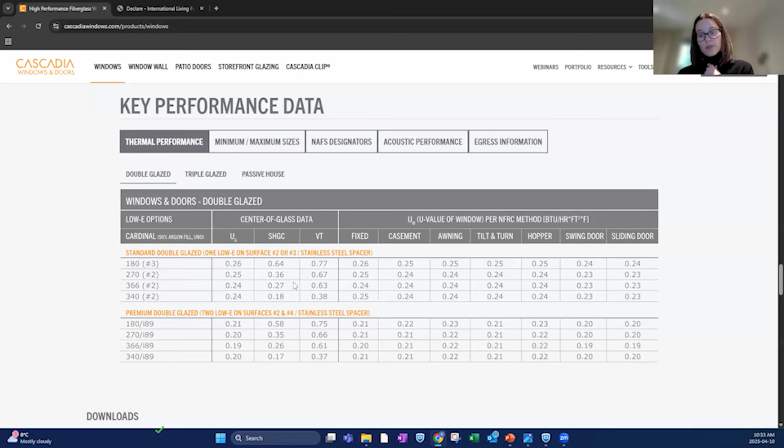But yes, for low-E coatings, for everybody dealing with projects today, you've got a lot of flexibility while maintaining essentially the same U values with our products overall, just playing with different low-E coatings. You can tweak the light coming in and the heat staying out or staying in, and most of our suppliers have equivalents to these. These performance targets from Cardinal are pretty good to use as your guide for what you will want to specify, and know that you can find alternates with other manufacturers if you need other things from your glass.

Right, okay, thank you—like bird friendly, for example.

Great, thank you Steve. And Laura, you have been very patient—we are finally to you. How are you, Laura? I'm good. There I go.

So, this has been a really good and very interesting presentation. We have been frustrated with European products where the locks are welded so you can't rekey them, whereas American and North American products have screws that can be rekeyed or master keyed and slaved. So your locks and cams—how do they work? Are they North American type or European type?

I can tell you that all of our hardware comes from Roto Frank North America. However, it is a German company, so technically European style hardware. It's what enables us to offer all of the tilt and turn functionality.

Can they be rekeyed by a local locksmith, or with the European ones do you have to replace the whole cam? I just had a project where the owner lost the key to the front door during construction, and the fix was to replace the cylinder with the key—so we shipped them a new cylinder with the key.

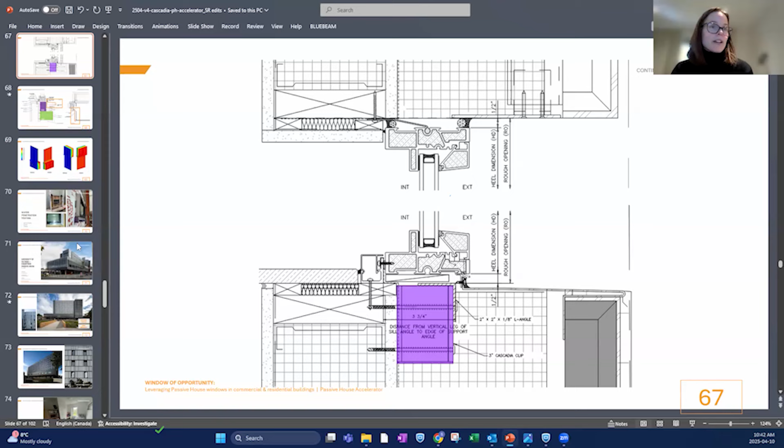So no, we do not have a cold weather certified version of our product. That doesn't stop us from shipping our windows into lots of cold climates, for passive house and non-passive house projects.

We know that this overall performance is going to exceed R11 - Chris, where are we at with the modeling? Has it come back yet? It's still going on right now, I should have it back in probably 2 weeks or so, and then we're going to review. Honestly, the feedback so far from the modelers is that the software is having trouble understanding VIG. The physical testing we've been doing is showing different numbers than the modeling, so we're trying to figure out which one is correct, but we know the lowest we've seen is this R11 inside of our frame.

Yeah, as an effective window value, including the frame. Our feedback from Luxwall, when they decided to partner with Cascadia, was: look, we've looked at a lot of different window frames, and yours performs the best with our glass by far. So that's why we're partnering with them - they kind of chose us a little bit. And yeah, so this is exciting.